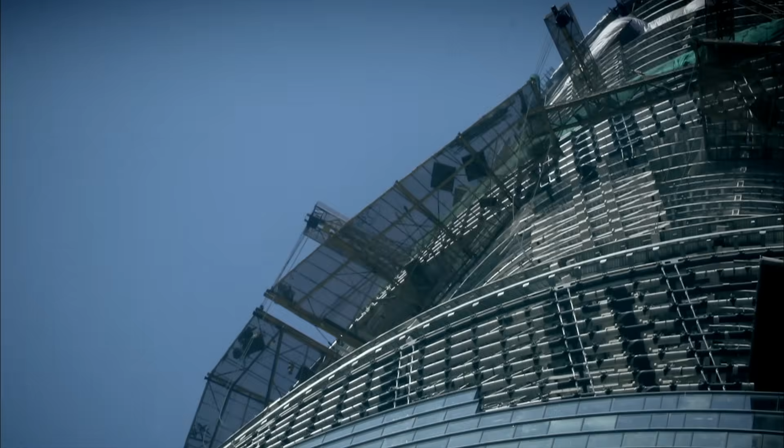Shanghai, China. It's the largest metropolis on Earth, suffering under the burden of 23 million people. But something is happening here, which may change the way our cities work forever. This building is actually one of its kind. No one has ever built this type of building before. An army of construction workers is racing against the coming typhoon season to create something completely new.

A haven with every amenity, with clean air, and with sunlit gardens perched high above the crowded streets. This is a whole new district, rising 2,000 feet vertically and packed into a single building. It is the Shanghai Tower, the city within the city, and it is a super skyscraper.

It's 6 a.m., Monday morning, in the world's most populous city. 13 million people are on their way to work. There's a reason why these workers are all dressed the same, and why 60 identical buses are converging on the same point. They're all coming here, to this building site. 3,000 workers will punch in this morning.

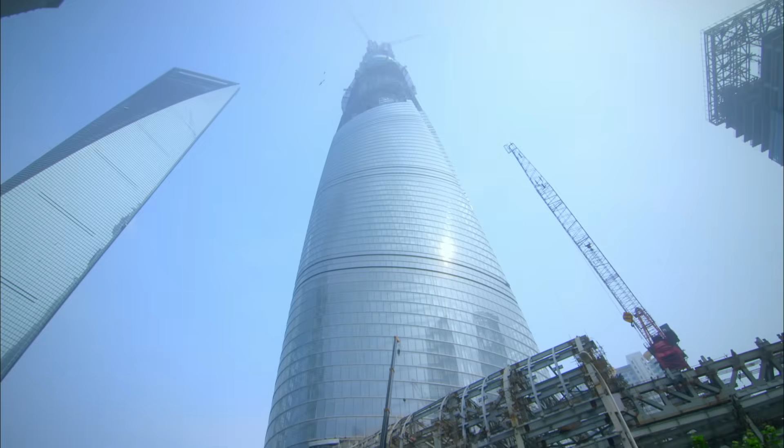But in a year's time, when it opens for business, the Shanghai Tower will be a workplace for 30,000. In fact, it will be a complete, self-contained neighborhood packed into a single block. A vertical city rising inside China's tallest building. Shanghai is a great city, and its diversity makes life very rich.

For more than 100 years, Shanghai has been China's commercial powerhouse. It has been expanding unchecked, and it shows no signs of stopping. The city is reaching a crisis point.

所以，城市病的现象，在这个城市当中也会有体现。 Problem one is pollution. 1 billion gallons of raw sewage hit the rivers every day. In a country where smog kills 1 million people every year, Shanghai's levels are now among the worst. Problem two is congestion. The number of cars has increased 5 times in less than a decade.

那么从目前来讲，上海可能它主要的一个交通可能是一个比较大的一些问题。 The third problem is simply space, or lack of it. Every square foot is accounted for.

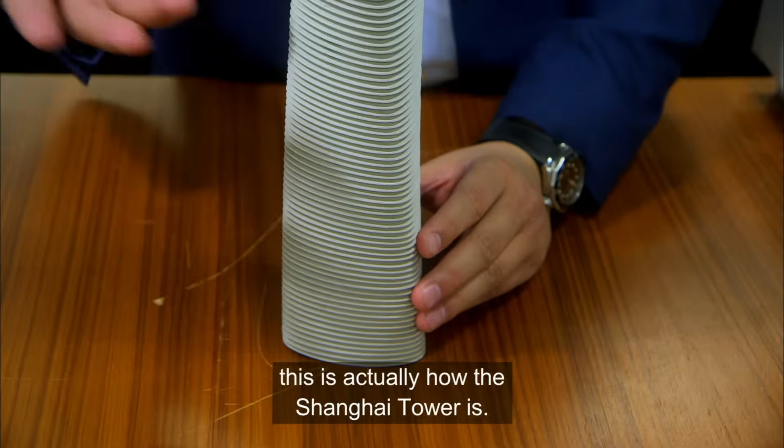Traditionally speaking, a city with that length, with a major arterial street across, and they have horizontal streets dividing them into blocks. Each of them has a street corner and maybe some kind of community park, a restaurant, coffee shops, hotels, offices horizontally. Then you lift them into vertical. And this is actually how the Shanghai Tower is. To meet the needs of modern Shanghai, they wouldn't use cars to get around.

We are offering you all aspects of your life. Either you go to work, you have food, or you have entertainment. They'd have hotels, restaurants, shops, but most importantly, space. In the building, they have this neighborhood community, to make them feel easy living in the building. But given that Shanghai is already full, there was only one way left to build, and that was up.

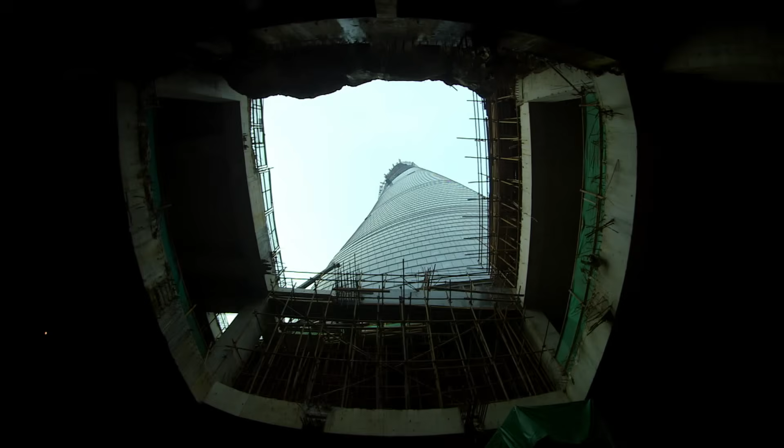This is the vision. A solid core reaching a third of a mile into the sky. 128 floors divided into 9 separate sections or levels. Encased inside a glass curtain wall, it rises 2,073 feet. And covering the entire structure, a second skin made of smooth, twisting glass. And the gap between them will be for gardens with up to 180 feet of headroom.

In the middle of a polluted megacity, there will be light, there will be trees, there will be space, and there will be cool, fresh air. But delivering all that, at heights never seen before in this country, will test the building's engineers to their limits.

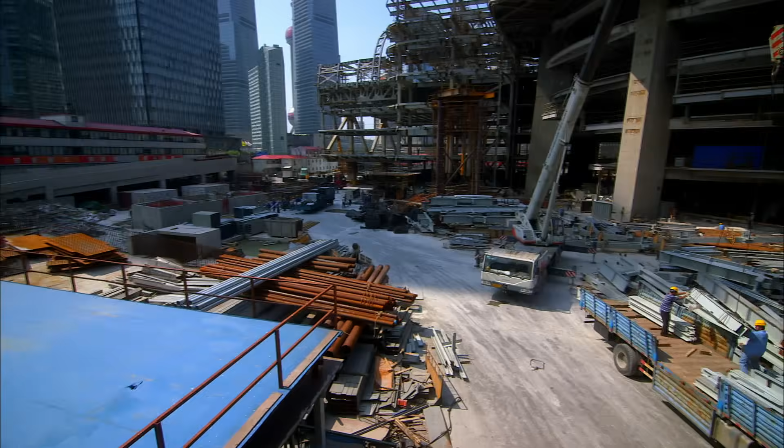It's the 4th of June, 2013. 3 years since the foundations were poured. In that time, the core has climbed to 1,800 feet. The Shanghai Tower is already China's tallest building. So far, this vertical city has demanded nearly 1 million tons of material. This is 120 or 121.

Ben Tranel, one of the architects on the project, is at the top of the Shanghai Tower's still-growing core to oversee a huge challenge. The workers are weaving a steel mesh around which concrete will be poured. While it sets, it will be held in place with temporary panels called formwork.

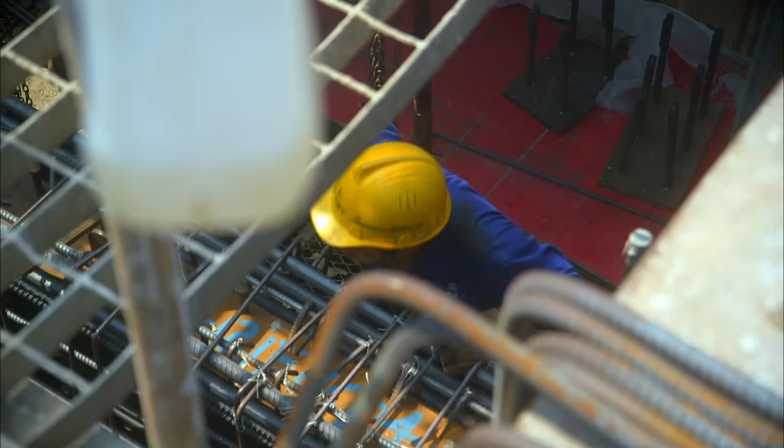The formwork is down below, and they lift the formwork up into place, and then they pour the concrete, and they'll do a several-story section at once, and then they just repeat that process. That process just keeps going up the building. It's a conventional process, made extraordinary by the pace of the work and the sheer height. It started in the basement, and 2 years later, it's unbelievable. I mean, you look at every individual tie, and you think somebody tied all of these pieces.

As an architect, I always feel a certain sort of humility when I come to a job site like this, because you realize so many people have to work so hard on details that you never see just to make it come to life. You know, really amazing.

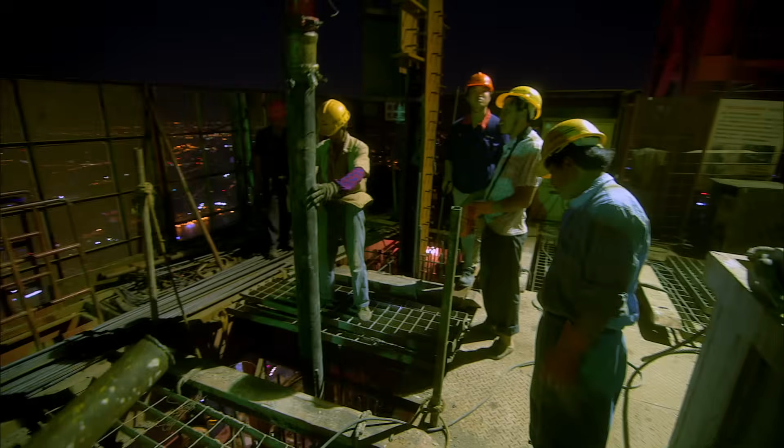Work on the core is around the clock. At their current rate, they can lay enough concrete and steel for the building to rise by 1 story every 5 days. But they still have 8 floors to go, and that means they need to go faster.

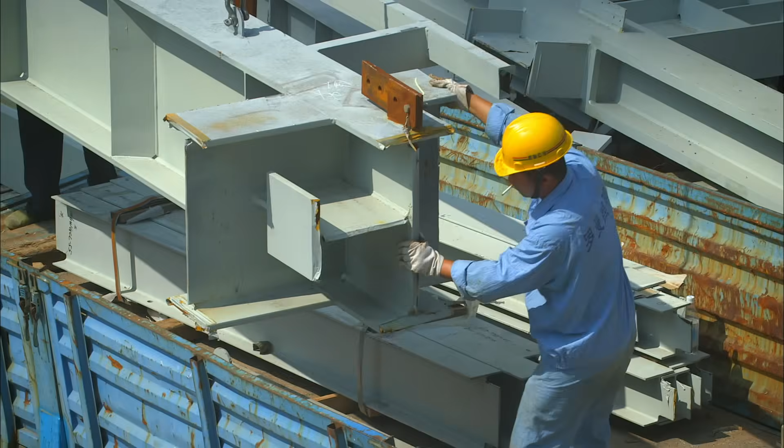While the challenges are the same as with any super tall skyscraper, this project faces a unique kind of pressure. Shanghai's typhoon season comes at the same time every year, and this year it begins on the 3rd of August, a mere 8 weeks away. Once the typhoon season starts, work will become impossibly dangerous.

In that time, as well as bringing the core to its full height, the crews face 2 other big challenges. First, to get one of the 20-ton units which will supply the building's air up to the 82nd floor. And second, to seal in the area that will hold the 5th of the 9 sky gardens with a curving glass wall 15 stories high.

Typhoon is the biggest enemy to construction. Almost 1/3 of the time, we have to stop work for the typhoon. In Shanghai, the typhoon can be very strong. It's like a hurricane. Trees on the road can be pulled off, roof can be pulled off. This is a very serious situation. We have to make sure the building is safe, and then we make sure the workers evacuate.

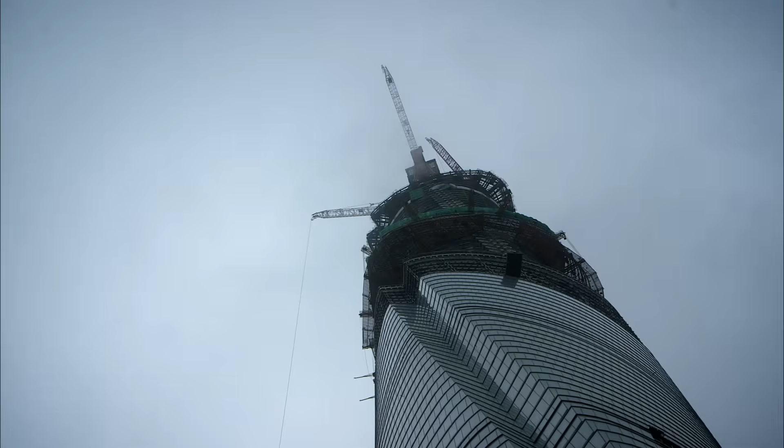Any problems on the ground are multiplied at height. This is the trade-off for making the vertical city. Once finished, the design will hold its occupants in a sealed, protective bubble. But until it's sealed, the weather can get in. If that happens, the winds here will rip the building apart.

But the tower's architects will risk a few weeks' vulnerability to see their vision realized. In fact, they've made choices that would be unthinkable on other skyscrapers. They've decided that whether you're on the 10th floor or the 100th, an airy, sunlit, open space must be within easy reach.

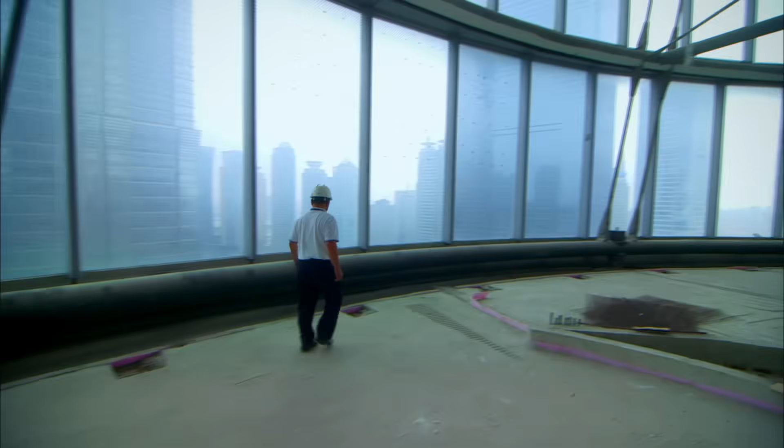The problem with a revolutionary design is that there isn't a precedent to follow. And building two skins, or curtain walls, around the same concrete core is a little like building one skyscraper inside another. This building is actually one of its kind. No one has ever built this type of building before. Daniel Choi is in charge of this part of the tower's construction. His challenge is to make glass appear to float.

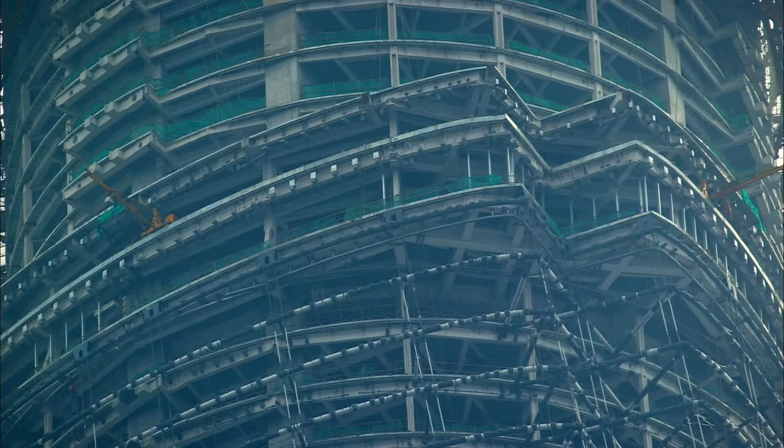In a normal building, we build a curtain wall attached to the structure, which is a stable structure. While the conventional solution would be to fill the space with steel supports, this would defeat the object of an empty, airy garden in the sky. We don't want to see bulky steel appear behind the curtain wall. So the idea is to have the outer skin of the curtain wall clean, so you can see through it, then you see the inside of the building. So we need to slim down the steel.

A slimline steel structure would collapse under its own weight. How can they support a 15-story section of glass wall using the bare minimum of metal? One floor of the curtain wall has a total weight of 115 tons. In this case, we have changed the way of building the curtain wall.

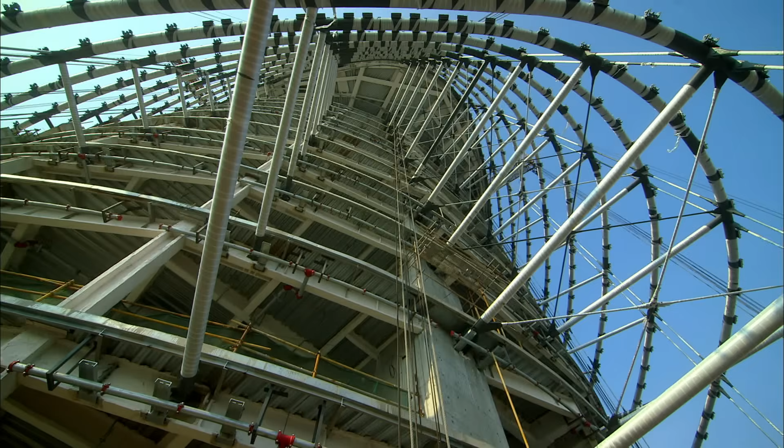Instead of fighting gravity, they're using it. The framework that holds all the glass isn't sitting on the floor below. It's suspended from the floor above. Instead of the traditional way of stacking structures up, this time we turn it upside down, so we hang the structures.

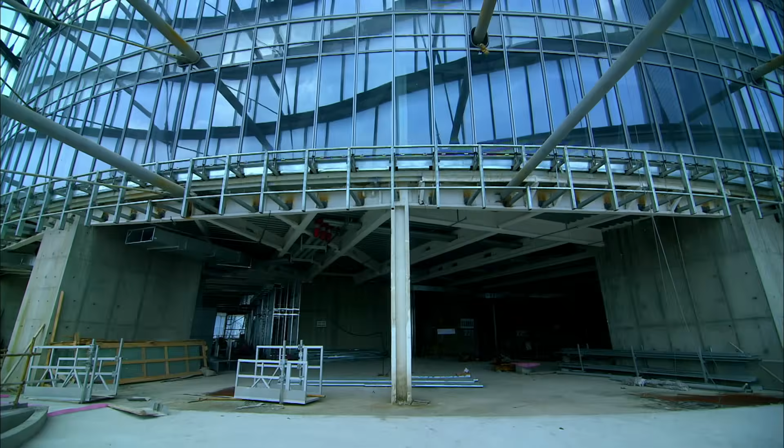All the exterior curtain wall is hanging on this ring beam structure, and then this ring beam structure extends from the bottom of the floor to this atrium floor. Once the process is repeated on all 9 levels, these will be the hanging gardens of Shanghai.

But how to actually build the framework baffled the engineers. The workers couldn't do their jobs while floating in midair. They'd need a solid floor to stand on. On top of that, they'd have to find a way to build downwards, while traditional scaffolds always build up.

In desperation, the architects turned to this man, Dr. Jia Baorong, 32 years old, a structural engineer, and the project's resident maverick.

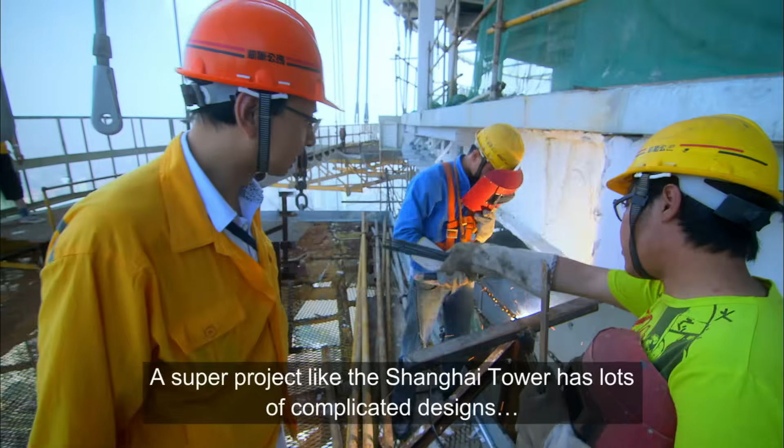What Dr. Jia proposed was a uniquely fresh approach to the problem. The structural engineer has to offer a solution. The solution that he dreamt up was a moving scaffold. He calls it the flying saucer.

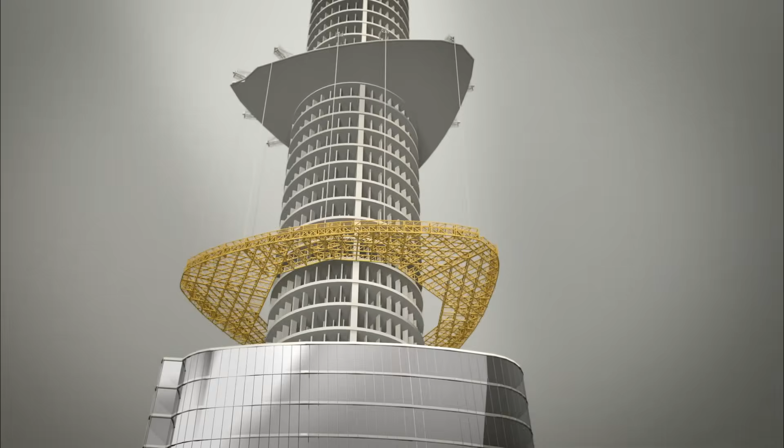Dr. Jia's flying saucer climbs to the top of a level and then slides down the core while workers add steel ring beams floor by floor. It's 100 tons of mobile scaffold that moves at the touch of a button. Dr. Jia knows his invention is vital to the success of the project.

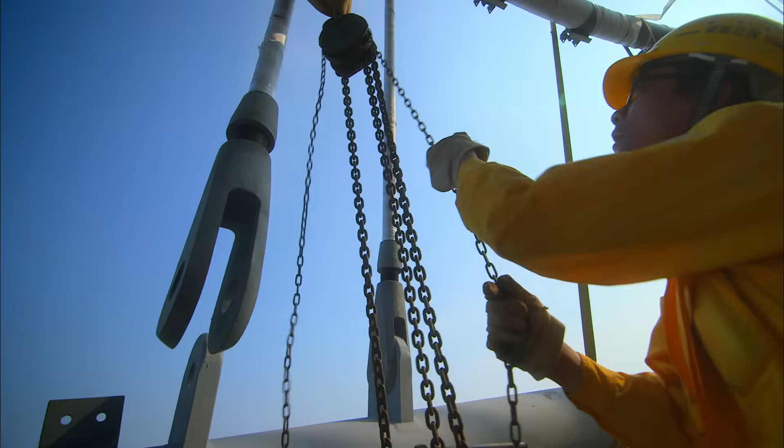Dr. Jia is under constant pressure to make sure there are no holdups. The level 5 support structure his team is working on, all 15 floors of it, must be finished before the glass can be installed.

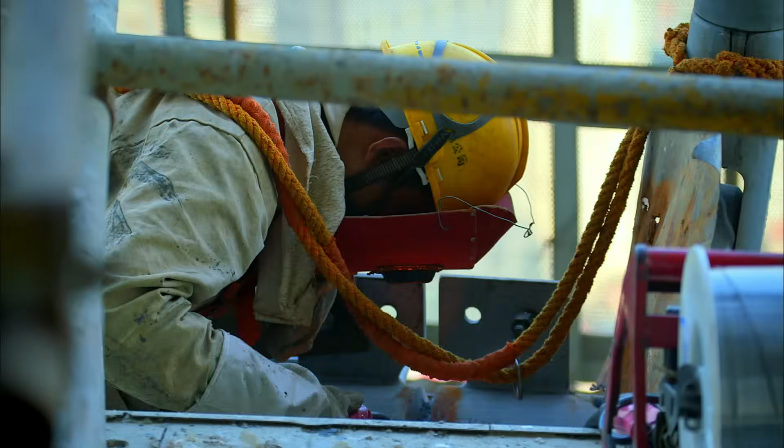In the beginning, the idea of the vertical city might have seemed a simple one. It saves space, and it lifts its inhabitants above the polluted city streets. But this solution creates a whole new set of complex problems. We would be expecting to have winds anywhere between 120 to 170 miles an hour at the top of the building. And that's sustained wind speeds, that's not gust speeds.

All tall buildings are affected by wind. And at the design stage, architects allow for the fact that they will sway. Occasionally, occupants of the higher floors will report that they can feel that movement and find it unbearable. It's a bit like motion sickness. So if you've ever been on a boat, for example, it's not typically a very large force, but a force that's as small as 1% of one's body weight. That's the sort of motion where people really start to feel uncomfortable.

The team behind the Shanghai Tower told their architects that any sort of sway was unacceptable. People meeting in a sky garden had to feel like they were standing on solid ground, even if they were on the 90th floor.

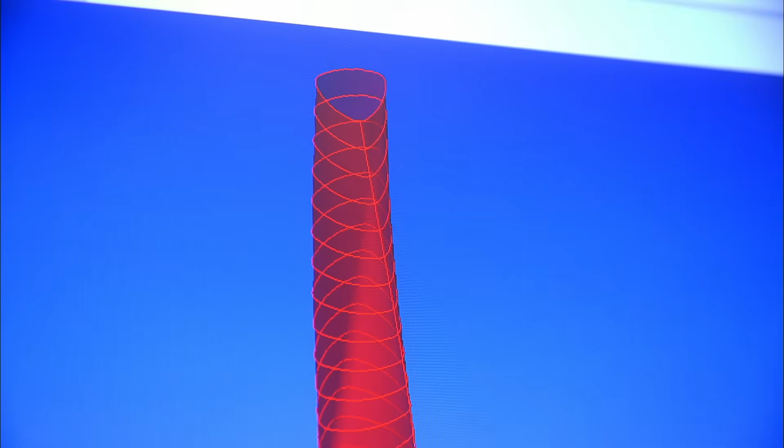Michael Peng is part of the team of architects that wrestled with this problem right at the start of the design process. They knew that rounding the corners of the building would help reduce the sway. The highest wind pressure always happens at the corner. More importantly, they knew that shifting the corners of the building as it climbed would have a dramatic effect. We build this thing up with the different twist option. The more twist, you get more pressure reduction. The twisted building has much more wind reduction, which compared to a square building will reduce about 24% of wind load. This was the decision that would define the shape of the Shanghai Tower.

The question of how much to twist the building was put to a group of wind tunnel experts, led by Peter Irwin. What we found was that as we twisted the Shanghai Center more and more, we got reduced wind loads. So when the twist was up to 180 degrees, that's what gave us the lowest wind load. 180 degrees delivered a structure that would not only be aerodynamic, it would also be rigid.

If you have a very rigid building, it's probably going to be a very expensive building. That's a polite way of saying that the perfect architectural solution would cost way too much. For perhaps the only time in the process, they agreed to look for a compromise.

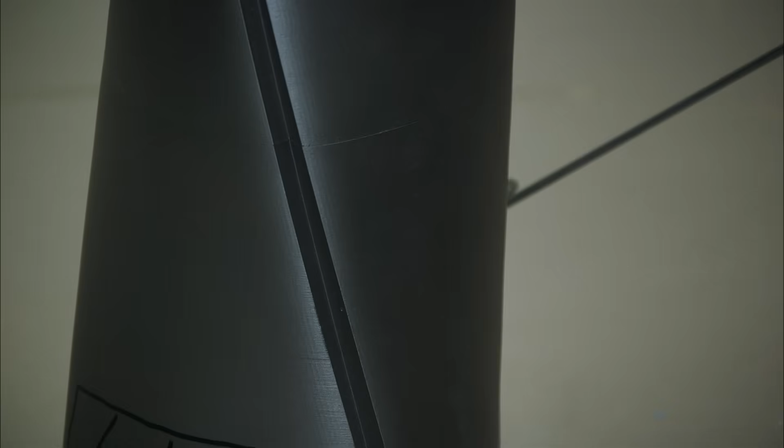So the amount of twist on this model is 180 degrees, but we also explored twists down at, say, 100 degrees as well. In the end, they settled on a twist of 120 degrees. This would keep the sway to a comfortable minimum for people inside and create an unmistakable silhouette on the Shanghai skyline. So that's why we chose 120 degrees. But 180 is better. But we can't do that.

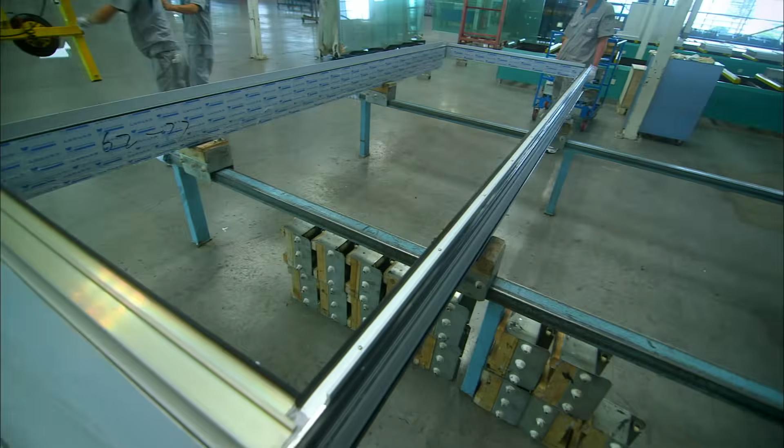Another unique feature is the 1.4 million square feet of glass that wraps the building. It's about more than shape. It took a full 3 years of trials to produce a glass that met the planner's demands. Able to stand up to Shanghai's unique climate and weather, maximizing protection, minimizing reflection, blocking out glare when the sun is high, but allowing the sky gardens to flood with light. And most importantly, able to withstand the typhoons that will buffet them every season. It is the most technologically advanced glass available anywhere.

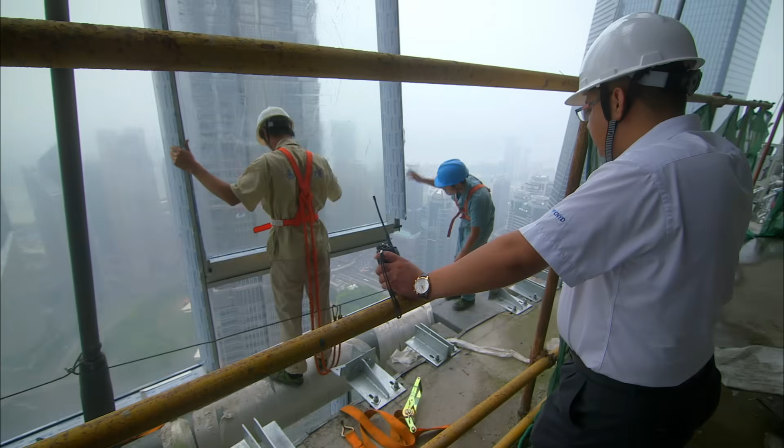Once the panels are sealed, stacked, and shipped onto the site, the hard task of installing them begins. There are now less than 6 weeks before the typhoon season hits. The slimline curtain wall support system for the Sky Gardens on level 5 is complete. But half the glass has yet to be installed. This is a critical period.

Without its skin, the level is wide open to the elements, and left unsealed, it is in danger of being ripped apart should a typhoon strike. As if to prove the point, a sudden downpour hits Shanghai, a precursor of the storms to come.

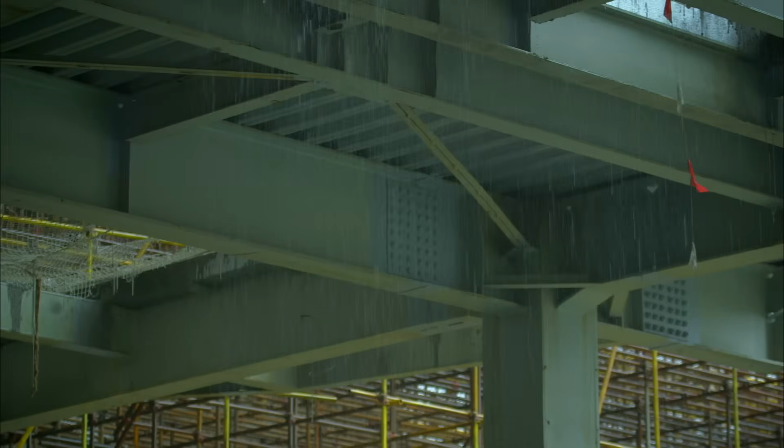As soon as the downpour subsides, Kong Ching Wei, the head of the company that owns the building, comes to the unsealed level 5 to see the damage.

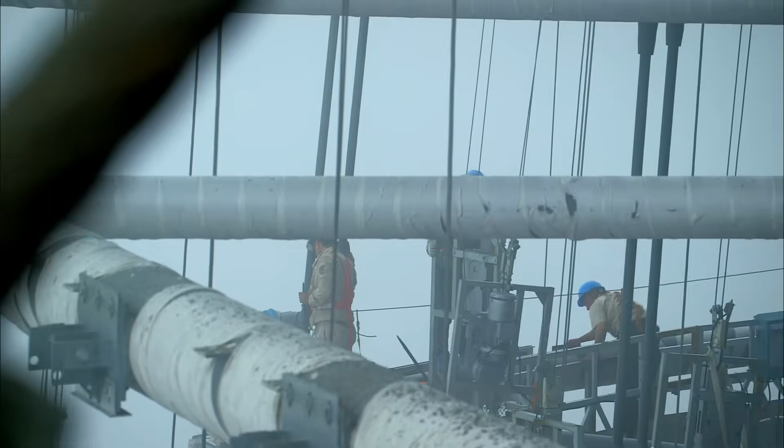First, Fu Siwei's team have to climb out onto the edges of the damp steel beams.

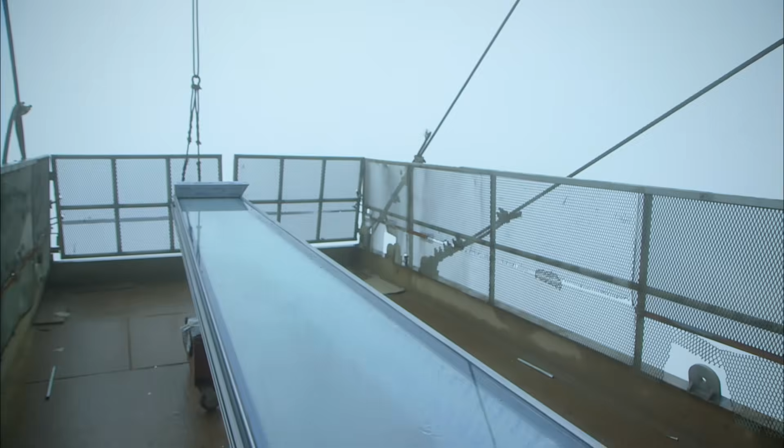Next, they must hoist the soaking wet glass panels outside the building before hanging them nearly 1,000 feet above the ground. Each custom-made half-ton window is then swung towards its position on the curtain wall.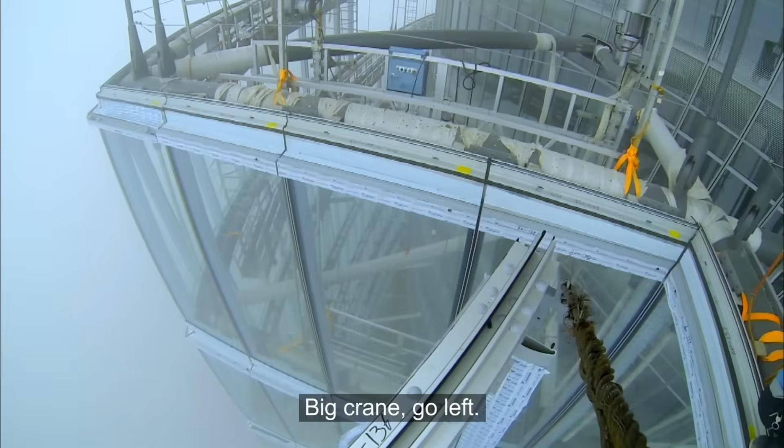Finally, the bravest workers, with only the narrow beams to stand on, must inch the frames into place. But it's slow, dangerous going.

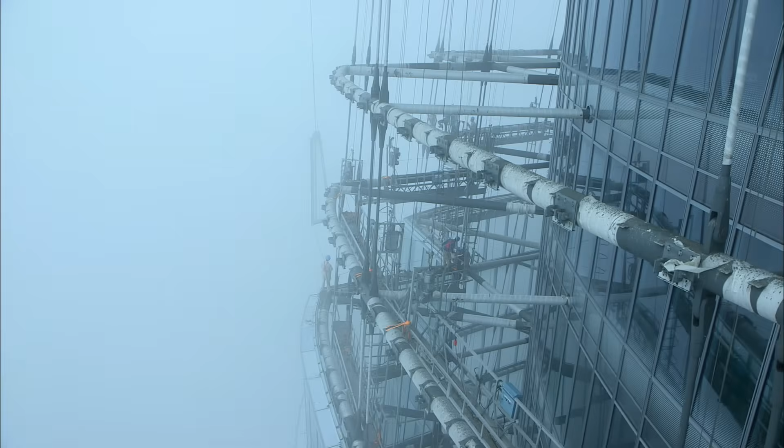These workers are used to moving about at extreme heights and have become virtually blind to the dangers.

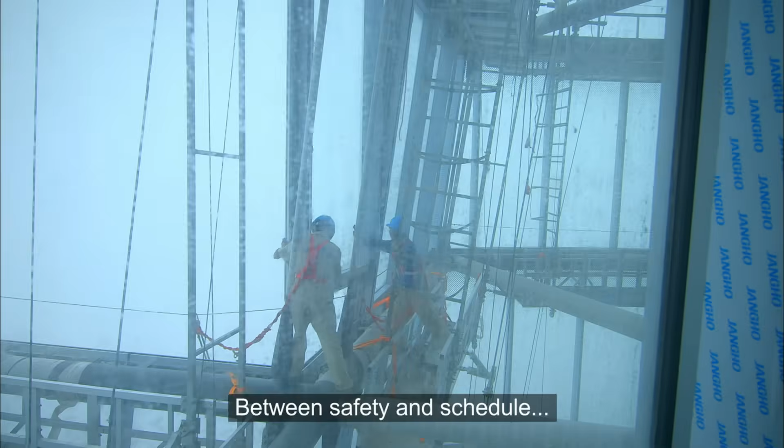Of course, a building like this size, we have pressure on schedule. We need to complete the building at a certain time. So between safety and schedule, we take safety.

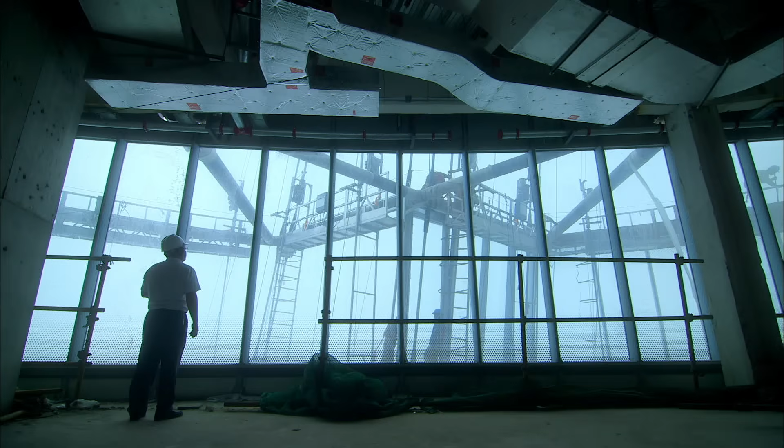Daniel's decision to put safety first means his team is behind schedule. At the end of the day, they only have 43 panels installed, 7 short of the daily target. At this rate, they will miss their deadline by 5 days and be at the mercy of the typhoon season. At this late stage, even meal breaks have to be run with military precision. Lunch for this many workers takes a platoon of dedicated caterers.

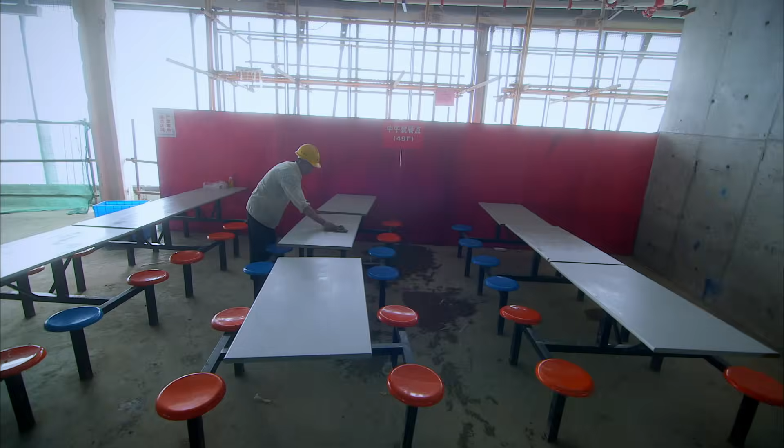There's one group of men whose lunch will have to wait. Because today marks a milestone in the journey towards the completion of the Shanghai Tower. A key part of the vision for this building, the creation of a self-contained vertical community, was that its occupants should be free from the smog and the extremes of temperature that blight the rest of Shanghai.

Now, the vast chiller units, which will regulate the building's air quality, in effect, its lungs, have arrived. Word has come in that company chairman Kong Ching-wei wants to see them in place before the end of the day. He's taking a special interest in this part of the build.

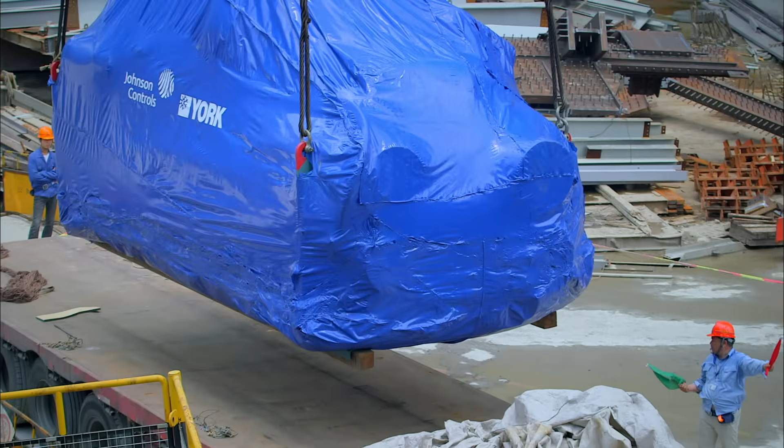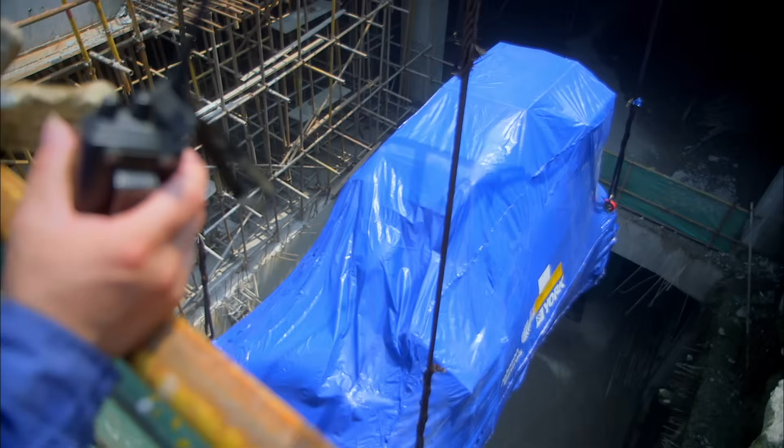While one 20-ton unit is earmarked for the plant room on the 82nd floor, this one needs to join 2 others just like it 2 floors down in the bowels of the building. And to get there, it also has to be moved 50 yards through the basement. Even though this is the most advanced building in China, the solution is one engineers have used for thousands of years.

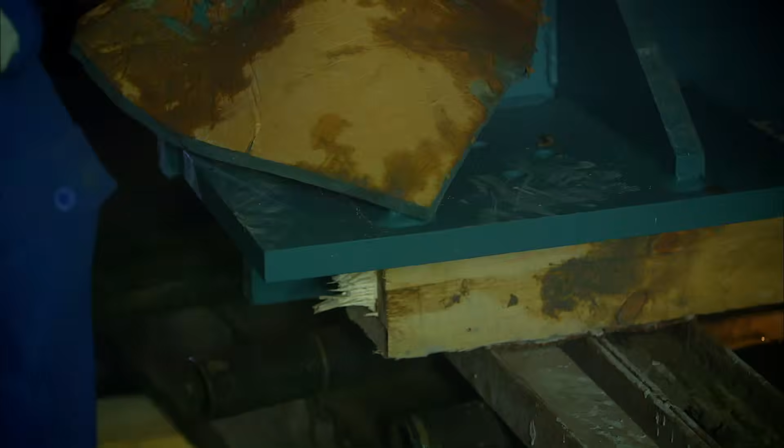The crowded basement is a labyrinth of beams and pillars. A pathway has been planned, and the chiller unit should fit through, but it's going to be a tight squeeze.

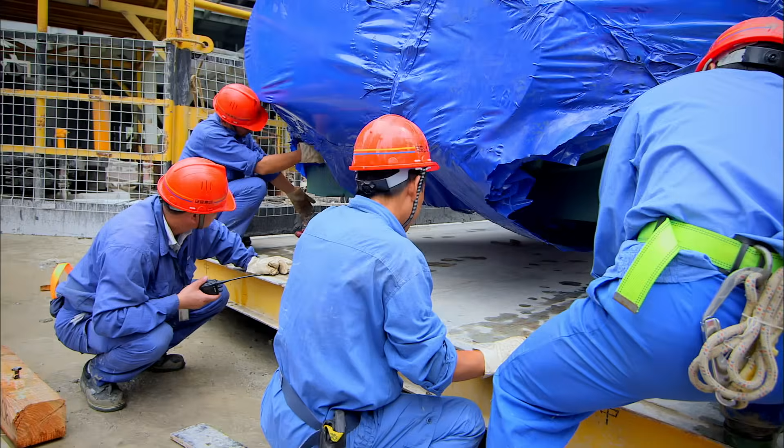The platform starts its climb. The installation crew will meet it at the 82nd floor.

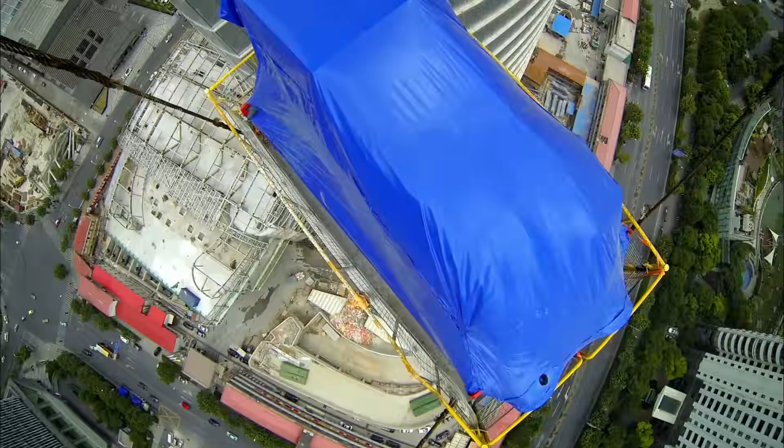Between the lip of the building and the edge of the moving platform, there is nothing but air and a 1,000-foot drop. Yuan Wengen's crew will have to bridge the gap and slide the chiller in.

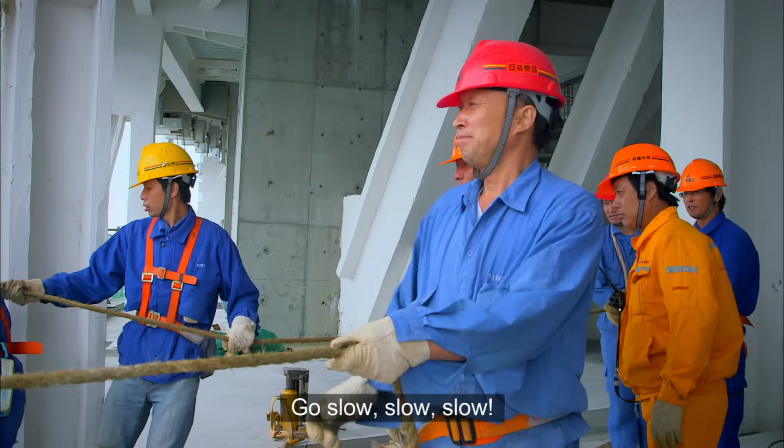The unit comes to rest at the edge of the building. Yuan Wengen wants it inside as soon as possible.

The plan is to use a winch, but preparations are taking a long time. And 82 floors below, the chairman's car is just arriving on site.

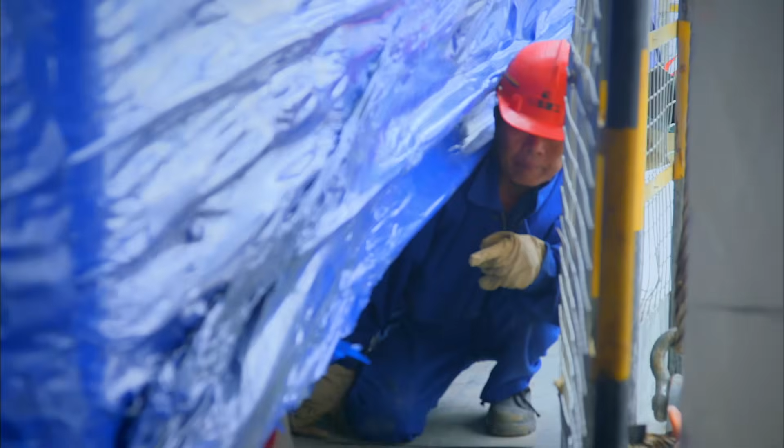The chiller unit is stuck halfway across the gap, dangling precariously in space 1,000 feet above the ground.

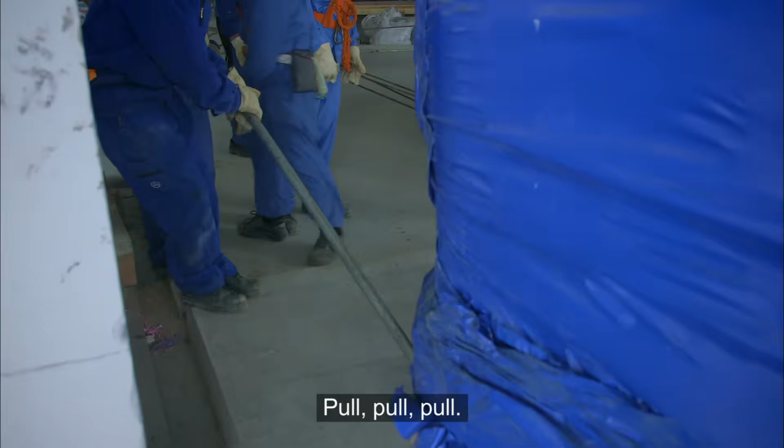The chiller unit is tilting backwards, away from the edge. The workers must pull it forwards gently onto the 82nd floor. If they jerk it, it'll pull loose and fall to the city below, tearing a hole down the side of the building as it goes and endangering the lives of anyone underneath. After 35 minutes, they managed to get the unit off safely.

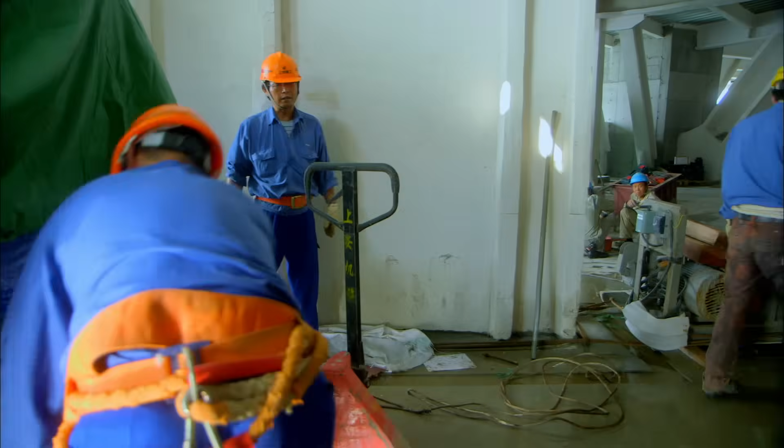Yuan Wengen may be happy with his workers, but it's not him they have to impress. Chairman Kong Ching-wei wants a report on his new skyscraper.

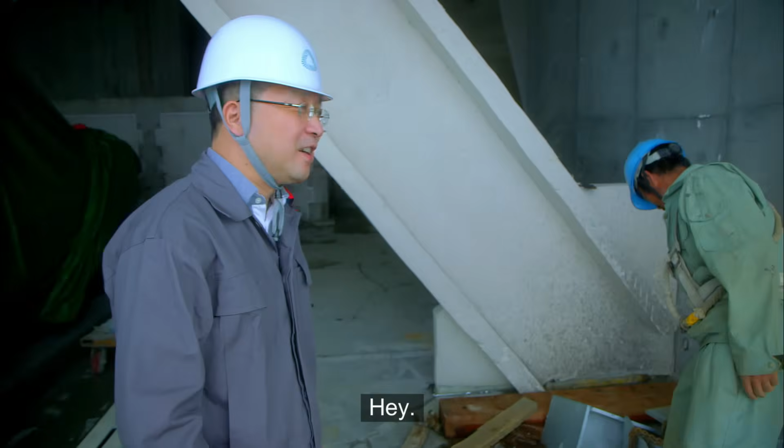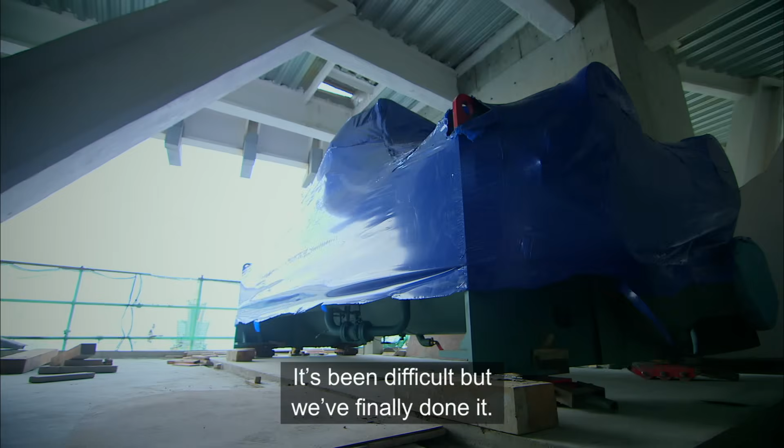Installation can wait until tomorrow. Once the units are functioning, they'll provide clean, cool air for the Shanghai Tower, no matter how bad the air outside might be.

It appears to be a day of inspections. While Kong Ching-wei is pleased with what he sees, his business partner, General Manager Gu Jianping, has arrived unannounced in the offices on level 3. This level is at the final stages of completion.

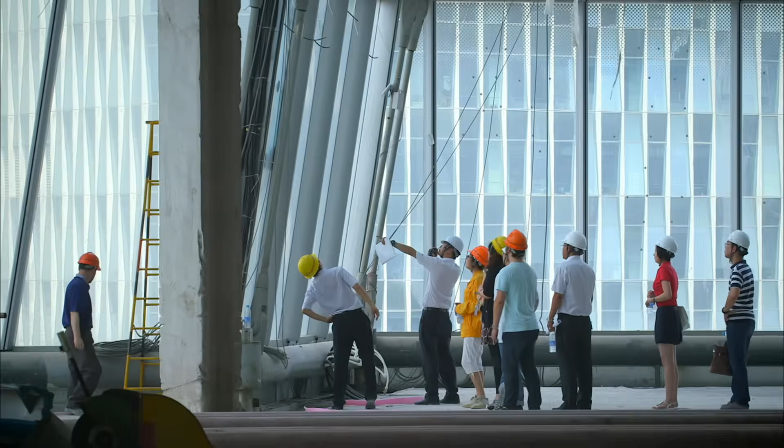6 days after Gu Jianping's inspection, architects Michael Peng and Ben Trinell are called to what is going to be the Level 5 Sky Garden. They have been told that all the glass for this level is in place, a full 10 days ahead of schedule. But they're concerned that in the race to finish the job, corners may have been cut. It is critical that they identify any problems now, before the real bad weather sets in.

I was worried about the joinery of the horizontal to the vertical. That's not the right detail, is it? Right. Do they do it everywhere like that? This one looks better than this corner. I think this will be the worst case. That one, look at right there, the conflict, it's really sagging. Yeah. That looks terrible. Let's see. That looks terrible. Right? What a mess.

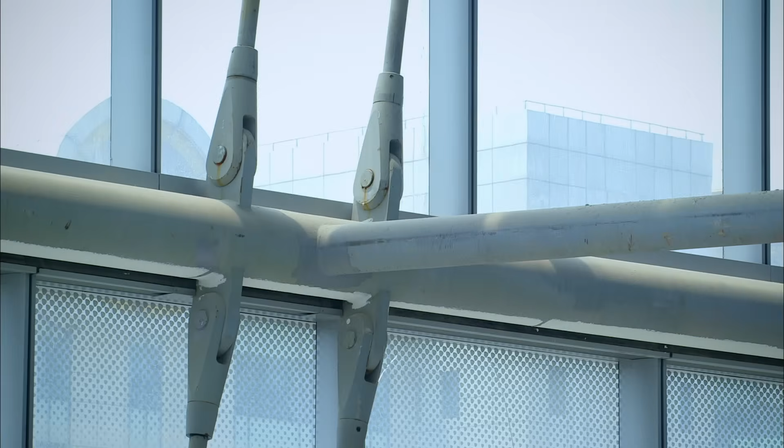There is clear cause for concern. The work done doesn't match the drawings that Ben and Michael gave the builders. So this detail was something that we talked about with them a while back, and we were expecting something different than what they did. We drew something different than what they've done. That happens a lot. So that one, it's not very flat, right? So he can fix that.

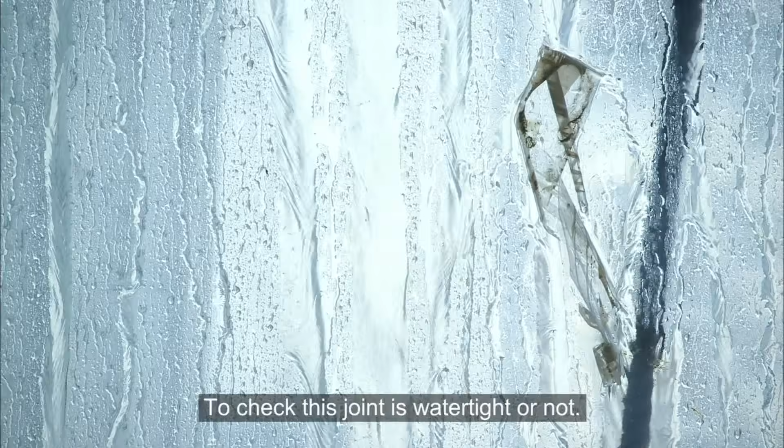Yeah. As they start to question the workmanship, Ben and Michael have to wonder how deep the problems go. They want to see for themselves how the windows stand up. We are doing the water test, so the labor spray the water to check this joint, water tight or not. A number of panels are chosen at random. They'll have to withstand a full 5 minutes of a simulated tropical storm without springing a leak.

We need a ladder or something. If they bring that scaffold over, we could be up there. A level 16 typhoon will dump up to 7 inches of rain in an hour. There's only one way to deliver that much water in a test. Be careful, Michael. 2 guys dangling from a rope at the height of the Eiffel Tower with a high-pressure water hose.

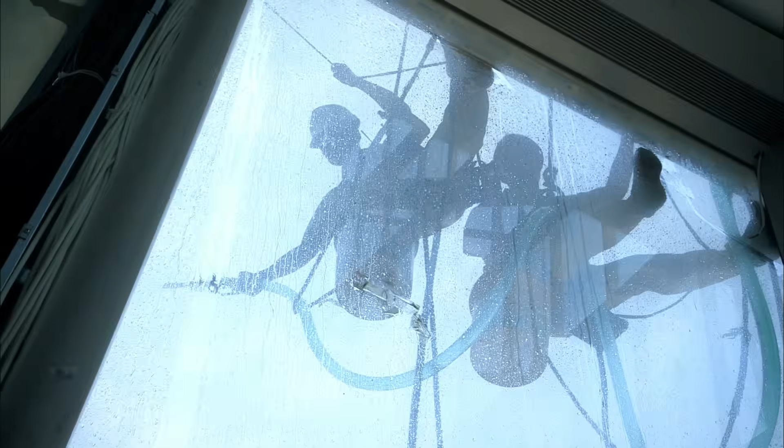This is the kind of test I was going to say is very boring until it's exciting. It's exciting when there's a leak. So you don't want any excitement. You want it to be boring. If the curtain wall isn't completely sealed, the wind and rain at this height will eventually tear the glass panels from their positions. So on this test, there are no shortcuts.

He needs to stay on that spot for 5 minutes. Okay, so stay on one panel 5 minutes and... Yeah, exactly. He's only been there for 3 minutes, I think. Yep. It's passed so far. We'll go back and see if they're still passing, but so far so good.

If every panel passes, level 5 will be sealed. A 15-story tall open space, proofed against even the harshest storms. And with the climate control units in place, the architect's vision appears within reach. Inside a year, this will be a sky garden. Now there's one challenge left to complete: the final top level of the core.

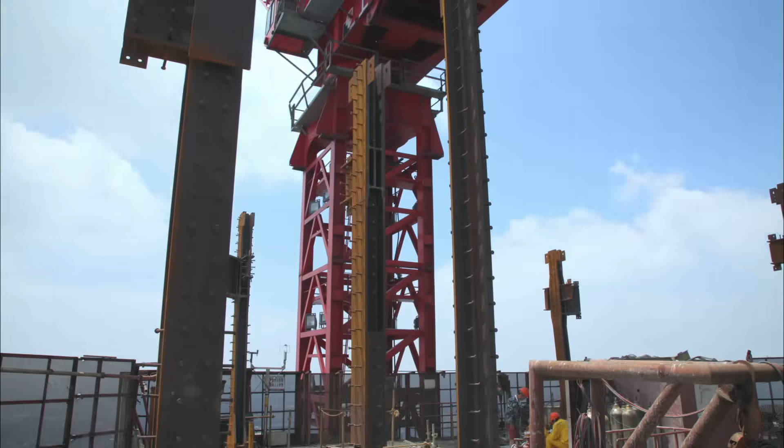For the last 3 years, as the Shanghai Tower has risen, 4 huge tower cranes have supplied the core with building material, nearly 1 million tons of it so far. Those cranes have had to reposition themselves constantly to stay above the build. Now they're higher up than any crane in China has ever been before.

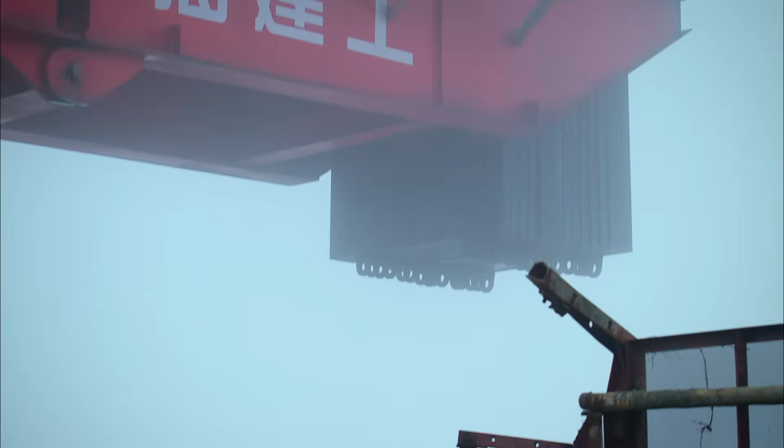Li Jie is a crane driver. He's been on this project since it started, 3 years ago, and nearly 1,900 feet below.

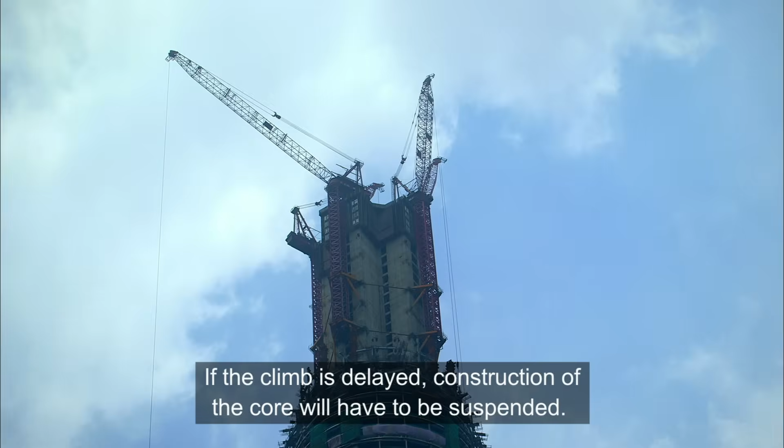In theory, jumping a crane is a simple matter of putting one bracket round the top of the crane mast and removing the one on the bottom, so the crane can continue to push itself upwards. In practice, it's far from simple. This is a 20-story, 40-ton structure strapped to the side of a building by nothing more than 2 welded brackets. The pressure to complete the job is enormous.

In 5 days' time, the news crews that have followed it since the beginning will be here to witness the placing of the final piece. That won't happen unless the crane jumps on schedule.

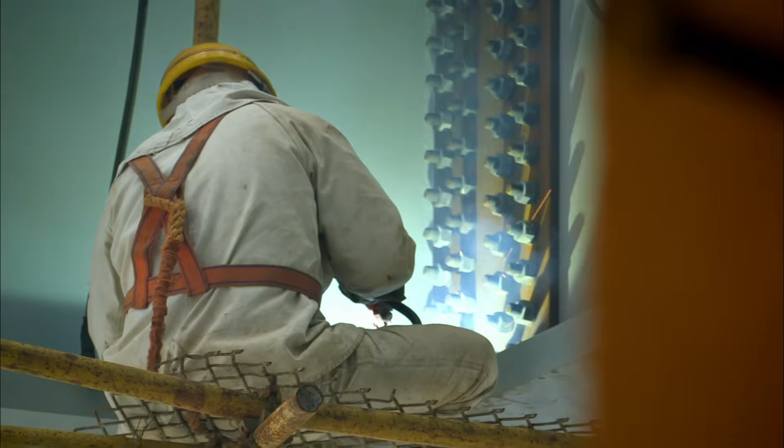The new bracket is in the process of being welded to the side of the core. If it's not done properly, the crane could easily tear the bracket from the wall, and the whole rig will fall to the city below. This is a job that can't be rushed. The welders have worked through the night. Now the crane inspector, Ouyang, has arrived. He will decide if the move can take place.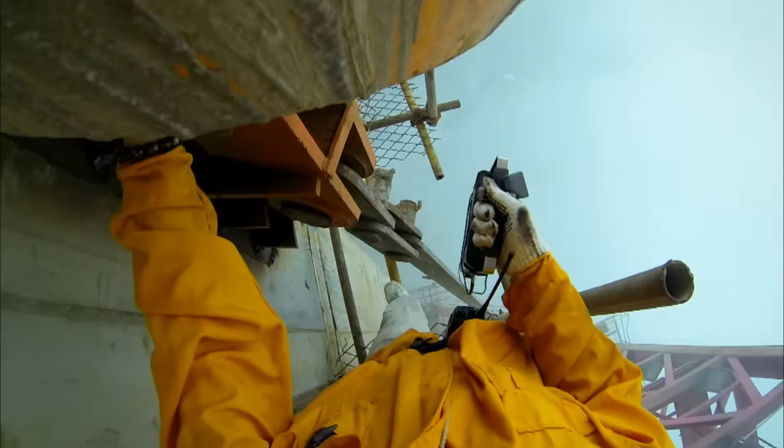His inspection must start with a 5-story descent inside the crane's mast. Then there is no choice but to step out, 1,850 feet above ground, onto a wet, temporary walkway on the side of the core. Finally, to inspect the bracket, he has to climb around it.

The danger signs on the oscillograph tell Ouyang what he needs to know. At several points on the bracket, the welding is unsafe. It looks like the rush to complete the job has led to more compromises.

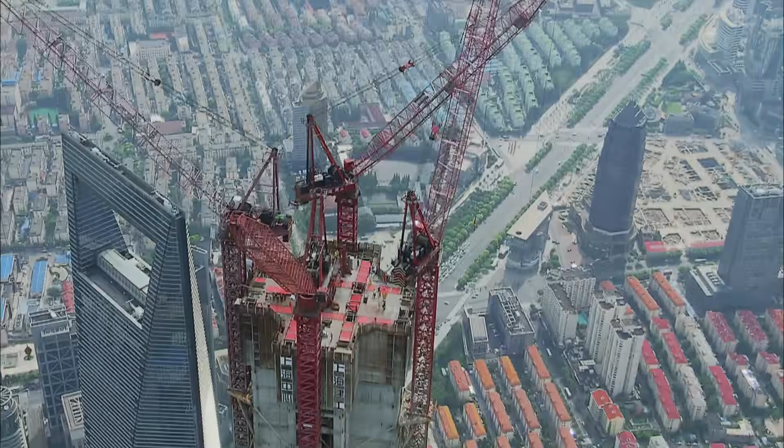On this day last year, 4 inches of rain fell on Shanghai in 12 hours. The floods affected huge parts of the city, killing 2 people. On the ground floor, the gates to the building site have been thrown open. All eyes are on Chairman Kong Ching-wei.

He has promised his various partners that the topping out ceremony, broadcast live on local and national television, will be a triumphant spectacle. If it doesn't go seamlessly, he stands to lose face very publicly.

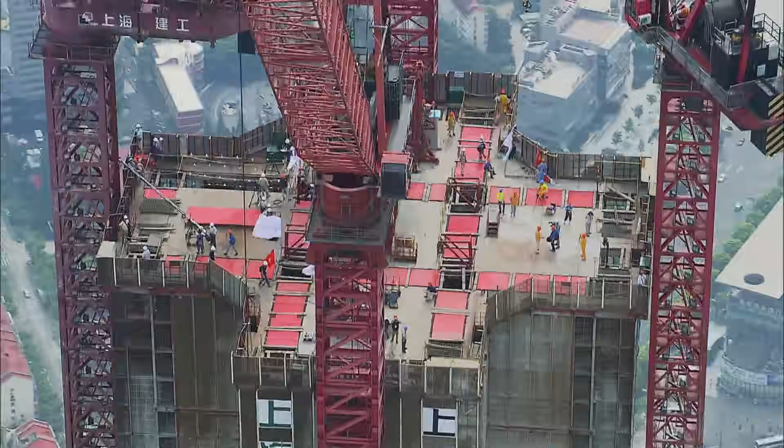He's not the only one feeling the stress. Also in the spotlight today is his star worker, Dr. Jia Baorong. He's 121 floors up, a staggering 1,900 feet at the top of the Shanghai Tower.

That one last piece, the 7-ton steel brace, still has to be installed. It's Dr. Jia's job to make sure it goes in with a minimum of fuss and maximum fanfare.

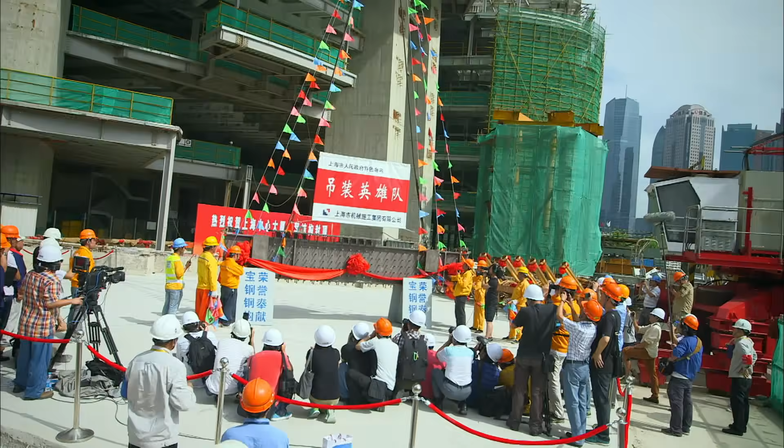As the invited dignitaries settle in for the show, the final piece of this gigantic jigsaw puzzle starts its long journey to the top. From this point onwards, the ceremony has to run with split-second timing.

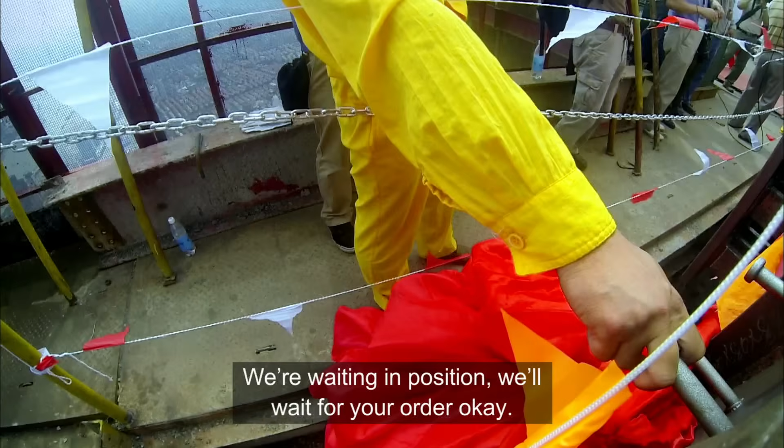At the appointed moment, Chairman Kong Ching-wei heads to the stage. 3 years of round-the-clock labor, and it all comes down to this.